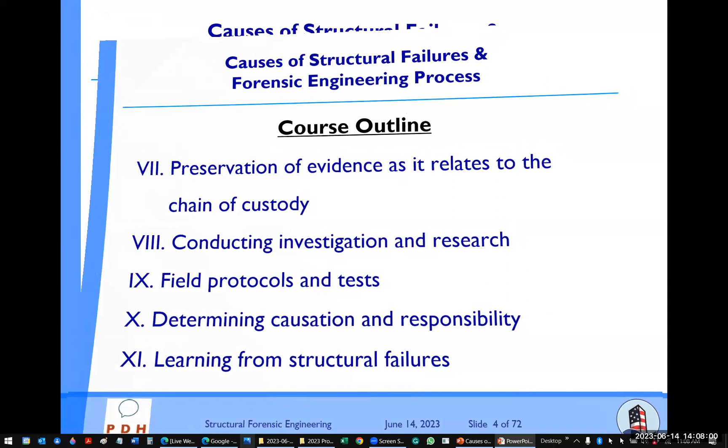So the first section, we're going to discuss structural engineering design errors, and I'll make sure I time myself accordingly, so there won't be any material left at the end of the presentation, at the end of the 2 hours by 1 p.m. my time in California.

Addressing subtle structural issues, failing to understand project objectives, underestimating demand requirements, insufficient design verification, and failure to validate the design assumptions. We're going to touch on each of these briefly and get some kind of idea about these.

My understanding, based on my past 15 years of providing webinars and presentations to engineers, is that the audience usually has a wide spectrum in terms of background, qualification, and experience. Some are new, 2 years fresh from university, some 50 years from graduation, some engineers, some architects, some general contractors, some mechanical engineers, wide spectrum. So I try to make sure the webinar interests everybody as much as possible, because I can't focus only on one group, like just structural engineers, even though I know the majority of the audience are structural engineers, but there are some from other professions.

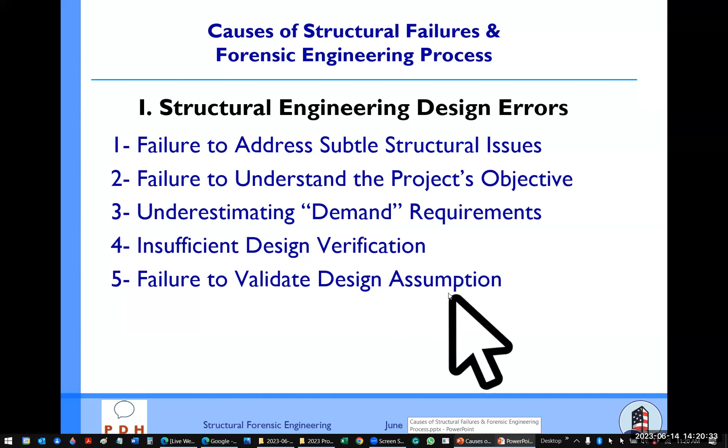So let's move on to the next part: defective construction. Again, just keep an eye on that spectrum of the audience.

Some of you might know some of these topics, some of you might be interested to get more information. I just try to make it interesting as a learning objective for all of us.

So there are two types of defects in construction: latent versus patent. Patent defects are the ones that are obvious, you can see them.

It's generally observed during a visual inspection by an ordinary person, it doesn't need to be a highly skilled structural engineer. It can be observed.

Like you see a cracked beam, cracked walls, a cracked concrete floor, a cracked foundation. These are obvious, right? However, there are other types of defects, which we call latent, referring to

defects that are not visually observable. Usually you need a licensed professional to observe them. For example, let's say

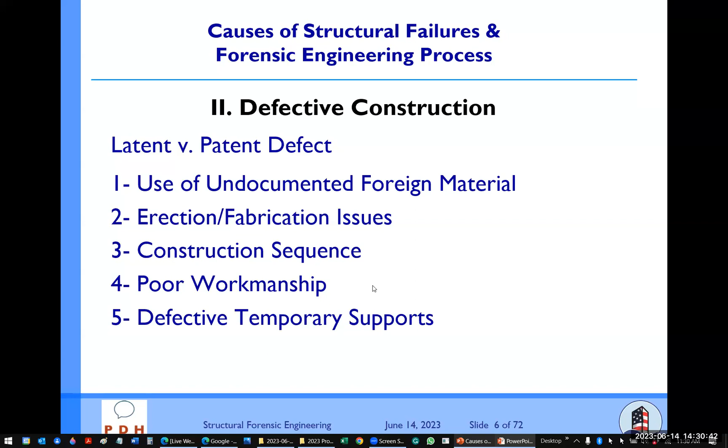Of course, not all of us get involved in temporary support design. There are some engineers that do that as a specialty, but again, when it comes for our review as a structural engineer of record, or EOR, it's a good idea to look at them.

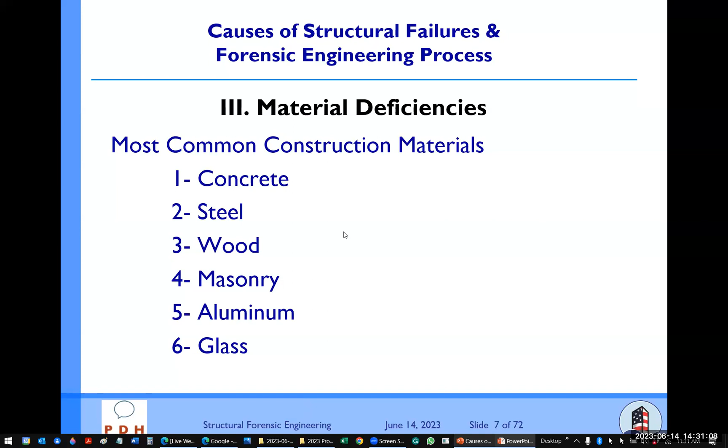Okay, so material deficiencies - these are the 6 most common construction materials used today in United States, in North America. Of course, fiberglass is another item in addition to the glass, but that's probably less than 1%. So the concrete...

There are 6 issues that can occur with respect to concrete deficiency: mix design, improper reinforcing, improper placement, improper curing, inadequate vibration, and on-site water addition, and so forth.

Forgive me, I have... okay. Roberto. Ah, I thought there was a question.

Okay, so concrete mix design.

I haven't dealt with that issue directly, but I've seen cases involving concrete mix disputes. That can be one item we keep in mind: the record of the mix design. Did it meet the requirement the structural engineer identified in his specification and general notes? Did it come to 3,000 psi, 5,000 psi? What was the design? That's important.

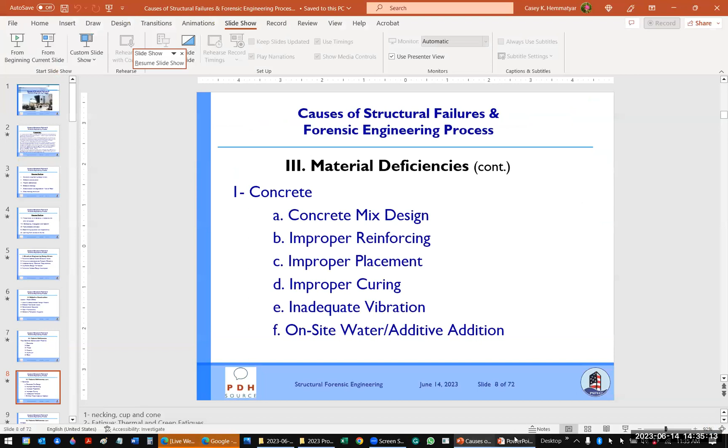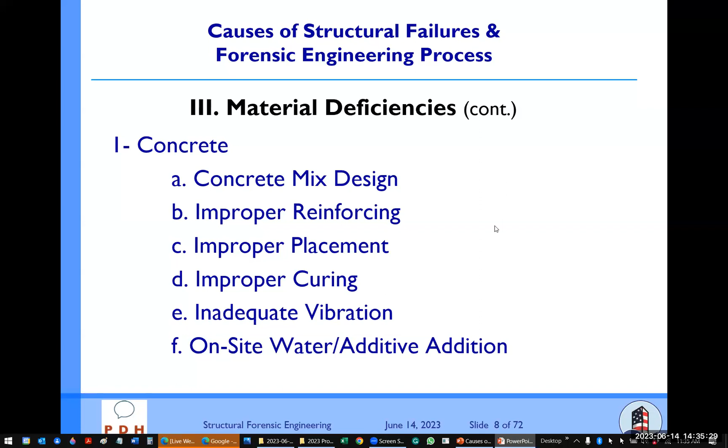Vibration - that's obviously the honeycomb and other issues resulting from improper vibration when dealing with large volumes. And of course, on-site water additions, which we all have problems with. That is very sneaky - sometimes there's no record of it, but it results in heavy deflection issues and displacement.

Okay, so the second common construction material - let's see what kind of issues we might have with them. Fabrication erection: improper installation of connections, weld quality, misalignment, localized failure, lack of environmental protection.

Let's start from the last one: galvanizing. Galvanizing is one of the methods used when dealing with steel to protect it against aggressive environments - for example here in California or Florida, areas near the ocean, very aggressive environments. It can destroy your building, God forbid, and you need to be very careful. If galvanizing is not done properly, it's essentially useless. It has to be done properly with all the details and requirements.

Another method, if possible, is stainless steel. It can assist us - it's a lot more expensive, has welding issues and so forth, but it is used in some cases. You don't want to build an entire structure with it, but some components, like canopies, exposed connections, guards, or handrails - these examples, you can.

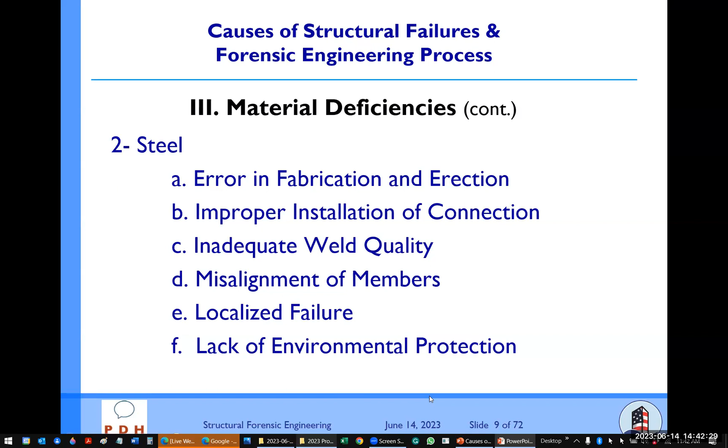Okay, next material is wood. Inadequate moisture content, expansion, contraction, lack of environmental protection, lack of proper maintenance, dry rot, insects, fungus, construction error—let's touch on all of these quickly.

Moisture content—have you ever been to Venice in Italy? The entire city is on wood piles, which go into the water below, and they've been there for hundreds of years. So does water destroy a wood structural member? It depends. If the moisture content is above saturated level, very high, then it doesn't allow growth of any fungus or any damaging process.

However, if it's above like 16% and below 60 or 50 percent, it can cause problems. It just destroys the wood very quickly. So let's keep that in mind.

Expansion and contraction—we're familiar with that, especially on roofs, and I've seen a lot of disputes because of that. We have a case study towards the middle of the project. I'll explain that, especially on roofs, when above is hot or cold or vice versa, below in the attic.

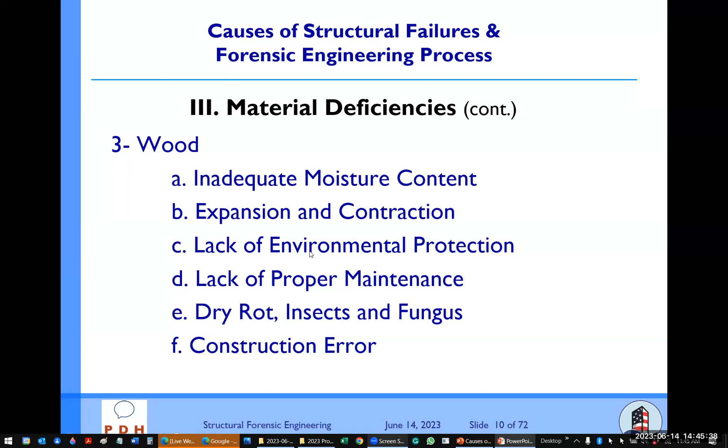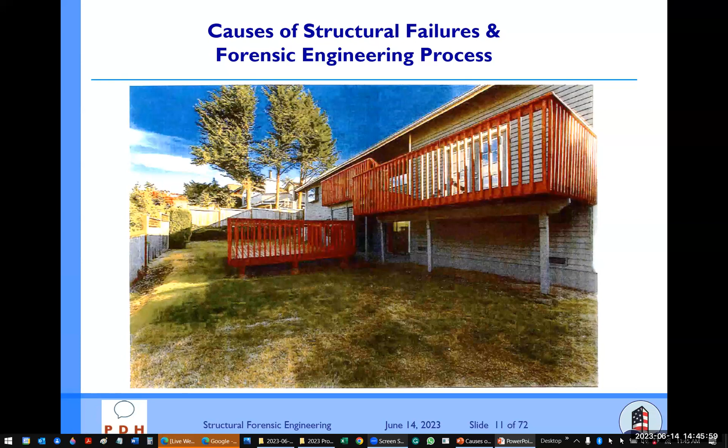Okay, let's take a look at this. This is one of the cases I had in Washington State. These rails are new—before, they were old rails and they failed, causing two individuals to fall from the second floor, resulting in serious injuries. This is after the fact. The individual was about 300 pounds and 6 foot tall, a guest of the homeowner. There were two guests, and the homeowner had bought the house from a flipper who installed these handrails without a permit. I can show you the connection—it's hilarious. This individual leaned over trying to take a picture and then fell, unfortunately.

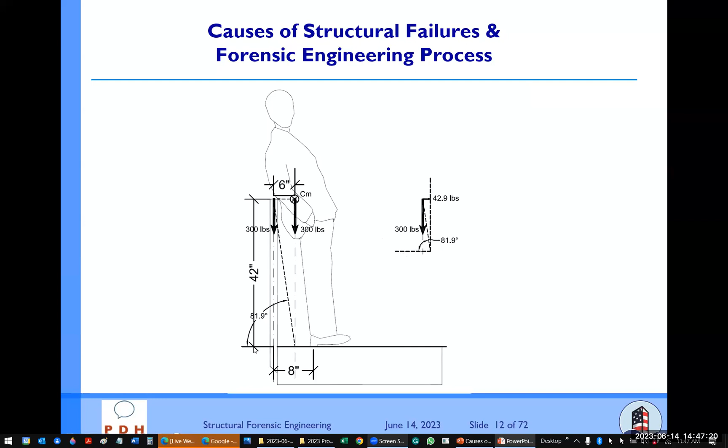So this is after the fact. They had to put these bolts and these 4x4 posts in between. And of course, this is the proper way of doing it.

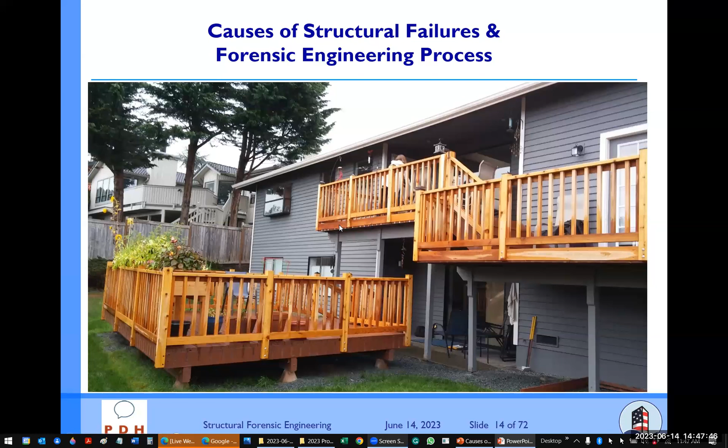Another example in wood construction. Again, this is a construction issue. He didn't have a permit. It's nothing to do with engineers, just the contractor.

Here's another example of construction and wood issues. This is a roof, seen from the attic. As you can see, these are OSBs, and these are the trusses every 24 inches. This line is a butting joint of 2 pieces of OSB. There's no spacing between these, so it doesn't allow for expansion and contraction of the OSB, and therefore it caused bumps or humps on the roof.

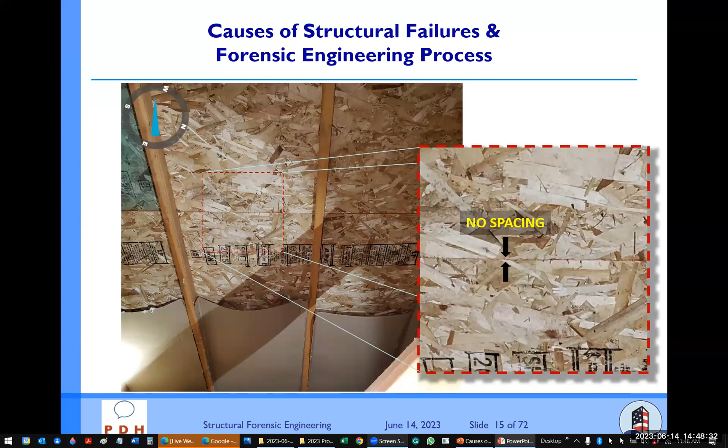So when you were standing on the front yard, you could see the humps on the roof all over the place. If you go back to the APA requirement, they specifically say you have to put a 1/8 inch gap in order to accommodate that.

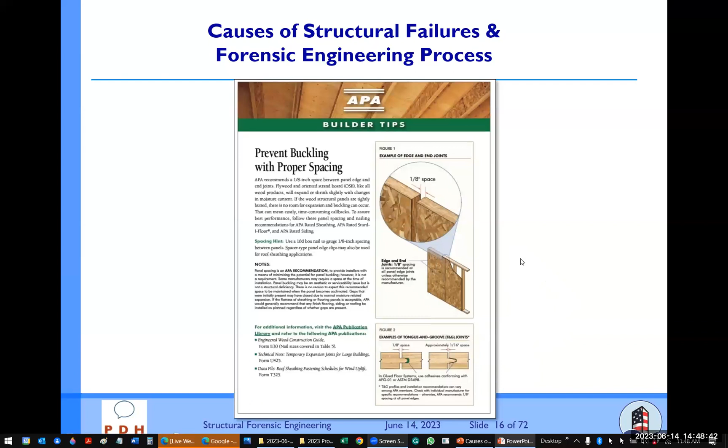Next material is masonry. Inadequate weatherproofing, deficient masonry units, improper mortar, thermal expansion, deficient expansion and control joint. Some of these are very obvious, but I had to mention them here.

Weatherproofing, deficient masonry unit, improper mortar - again, same discussion that we had for the concrete mix, the same thing applies here.

Thermal expansion and expansion and control joint - essentially we are discussing the same thing, more or less, unless you also want to keep in mind these facades, especially in Eastern United States, New York and so forth, where freeze and thaw can cause facades to fall off the building, and sometimes they fall from a 5-6 story building.

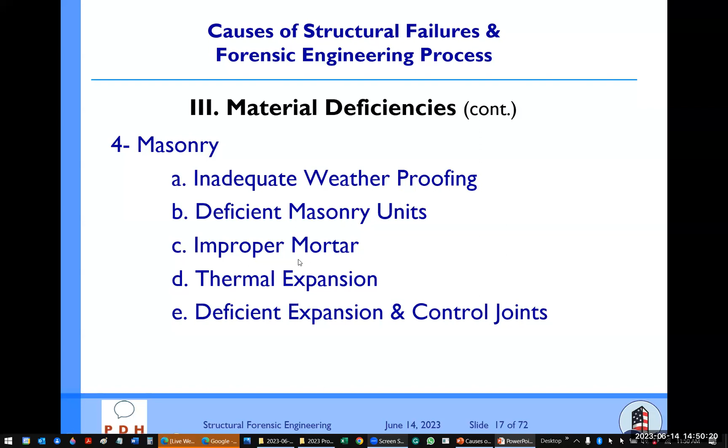That is an issue, but thermal expansion generally speaking refers to longitudinal expansion, and usually every 30-40 feet architects and engineers like to put vertical expansion or control joints in order to accommodate that. However, sometimes there are exceptions - you don't have to put that, depending on the construction condition.

I've heard that sometimes it can be avoided, but most of the time it depends on the construction configuration. Excessive loading, number 4 - depending on the material, the response is different, and depending on the load duration, and depending on whether the material is brittle or ductile.

What is load duration? Load duration, in my opinion, is extremely important. Load duration and load condition - static versus cyclic loading. Static or permanent loading versus cyclic loading.

Just to touch on this, load duration - as we all know, in NDS, the National Design Specification for wood, we have a load duration factor only for wood. We don't have this for any other material. It varies from 0.9 all the way to 1.7, depending on what kind of load - whether it's roof loading, dead load only, snow load, seismic load, wind load, or impact load. We can increase the allowable stress design with that load factor.

We can't do that with any other material, but we have to be careful. Sometimes when we come in for a roof that is constructed with wood members, we say okay, they allowed for 20 pounds per square foot live load, construction live load. Now I'm going to put 15 or 20 pounds per square foot, the same amount of load as was in the original design load sheet of the original structural engineer.

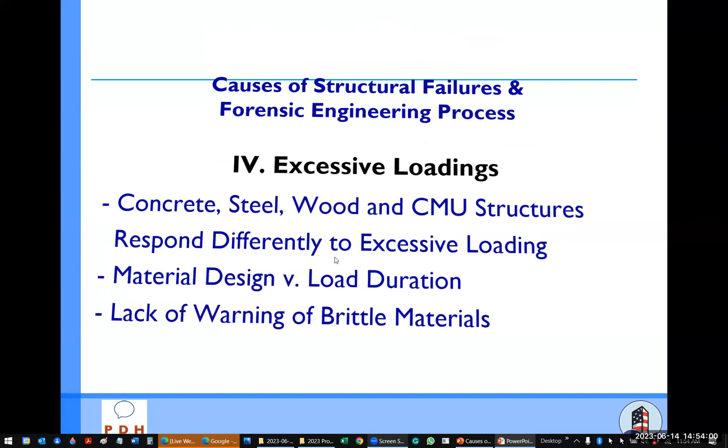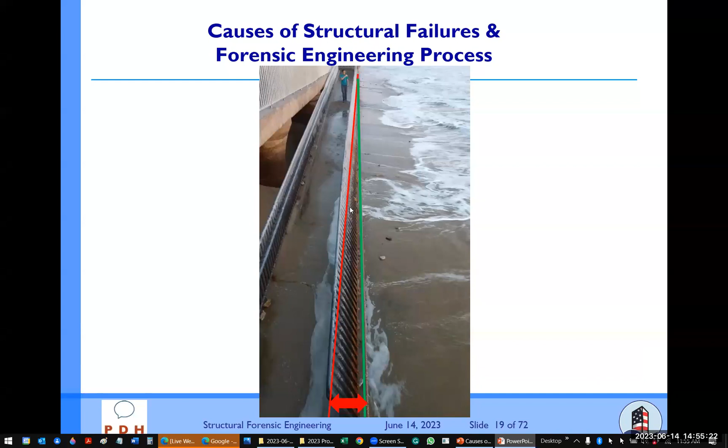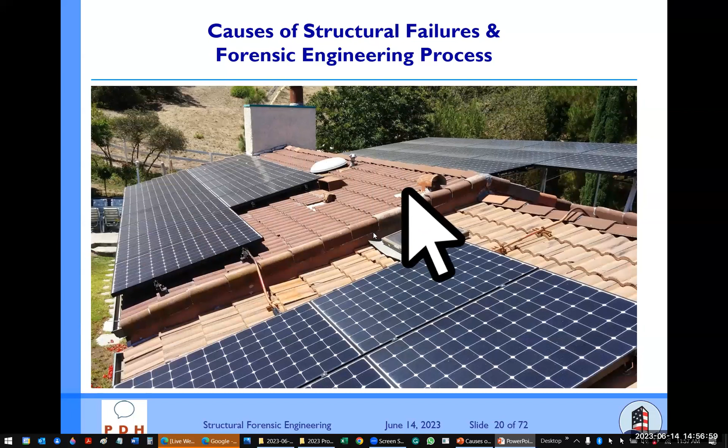The contractor decided to elevate them with 6-foot vertical poles or posts, and put them like that. You can figure out the problem—concentrated load going into the members, plus wind uplift and all kinds of stuff. So it caused the fracture of this ridge beam, which is exactly under here, and they were not accounting for the complications there.

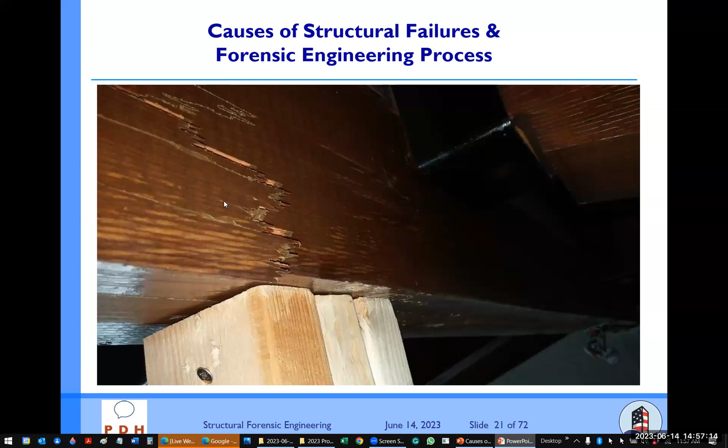So I required immediate temporary shoring, which they put on the bottom. You see this fracture is on the top—it's very, very serious—and the fracture comes in here on the bottom as well. These are temporary shoring. That was exposed wood, so you could see it, but imagine if it had drywall and ceiling finishes—it would be one of those latent defects instead of being patent.

Deterioration and degradation. Concrete and steel behave differently in this area. With concrete, we have corrosion and spalling. With steel, we have other issues.

Corrosion, again, I don't want to bore you. Corrosion in aggressive environments—near the ocean, as long as you're within 5 miles, 2 miles, or 3 miles, it can be serious. The closer you get, the more serious. So epoxy coated rebar is one of the solutions, and adequate concrete coverage is another solution.

As you know, when rebar in concrete corrodes, it expands several times the original material, and that force is enormous, causing spalling and cracking of the concrete. So be careful whenever you see efflorescence on a concrete material, or on a reinforced CMU masonry wall.

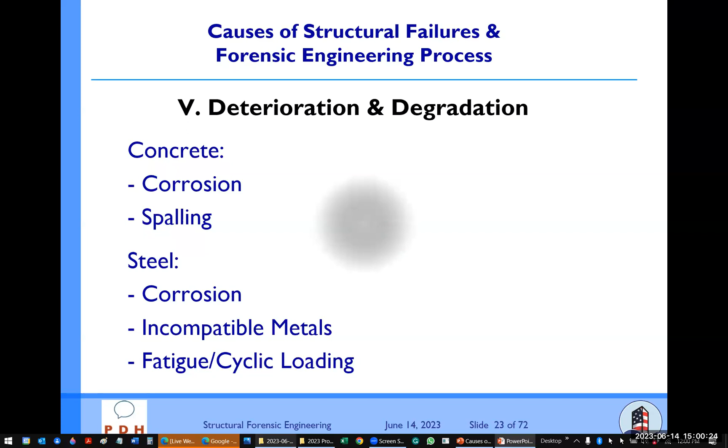Fatigue and cyclic loading—that's a completely different animal, very serious. I've seen it many, many times causing failures. We'll touch on that a few slides down, because one of the cases at LAX, that was the problem.

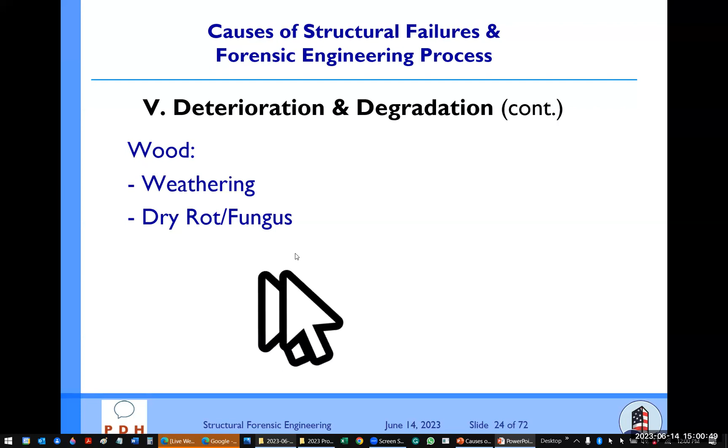Deterioration and degradation—weathering and dry rot fungus. That's very common, I'm sure everybody is aware of that. Sometimes you're forced to remove and replace; sometimes you can just do the repair, but the repair has to be done properly—epoxy, or other methods. CMU.

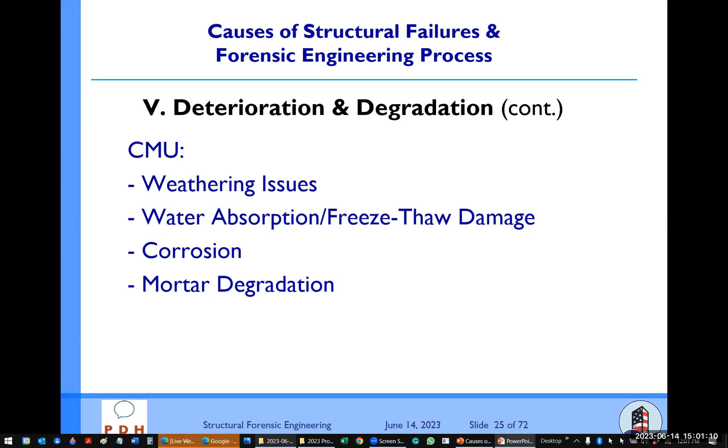Weathering issues, freeze and thaw damage that we discussed, corrosion and mortar degradation, similar to concrete that we discussed and similar to the defect that we discussed earlier.

Number 6, documenting the failure. Let's say there's a failure and we are at the site and we want to document it. Sometimes we go a year after the incident, but there are still ways to do that, and that's why preserving evidence becomes so crucial. Sometimes you're there immediately, a day or two or a week after the incident, and everything is untouched, which would be the perfect condition. That would be the best.

Identifying valuable physical evidence, whether it's a fire, mudslide, flooding, earthquake, gravity failure, wind, whatever it is, there is evidence that we need to collect. Let me give you a small hint for fire, for example, that will be very helpful if you get involved in a fire investigation. I have other programs on fire, flood, mudslide, and earthquake scenarios where I discuss this extensively, but here I'm just touching on it briefly.

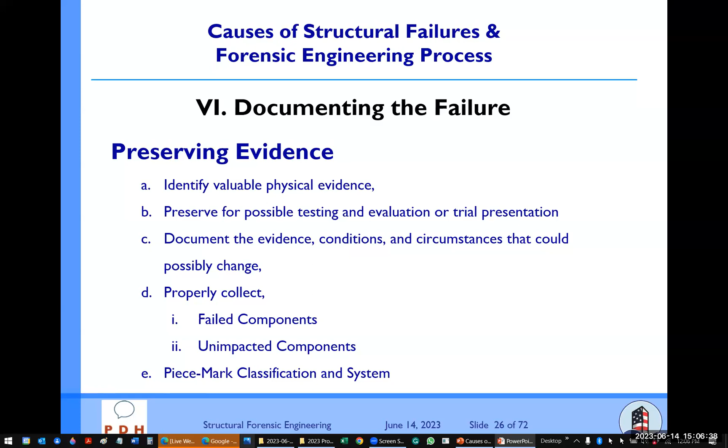Piece mark classification system: usually when there's a legal dispute, every component we collect has to be piece marked. That's a legal terminology, the mark used for each item of physical evidence. That is a unique number, and in all documentation, reports, everything, we refer to those piece marks to make sure there's no confusion. Another item you might be interested in is called a Bate number, which probably a lot of you already know. A Bate number is again a unique number for documents.

Piece mark classification is for evidence, for physical evidence, but Bate number is for documents. Every single page of every document, whether it's a deposition, a structural engineering calculation, or a plan, has a Bate number assigned to it, which is very unique. So when we're talking about something in a deposition, a court trial, or a report, we can refer to that Bate number and it's very unique. Nobody gets confused. We don't need to say such and such report dated by that author by that page number. We just give them the Bate number, and it goes exactly to a specific page of a specific document.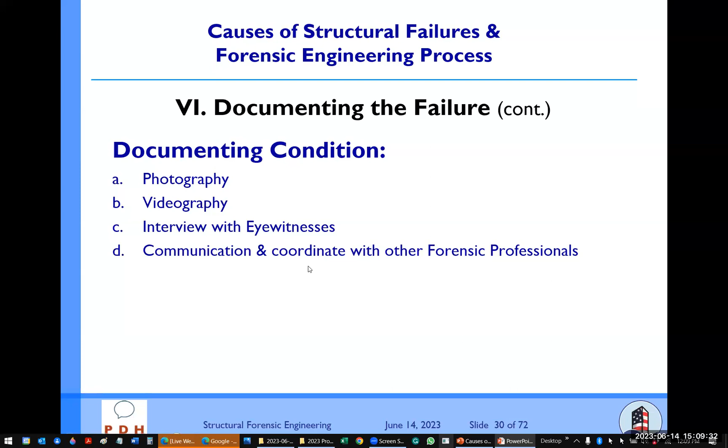Chain of custody — what is chain of custody? In structural engineering, you go to a property, to a site, and you see some physical evidence. Somebody has to be in charge of that until the case is settled, and only then can you throw it out. Until then, somebody has to make sure and is legally responsible to preserve that same condition as at the time of collection, for the whole investigation process and for trial or arbitration, whatever it is. That process of maintaining and holding this in your possession is called chain of custody.

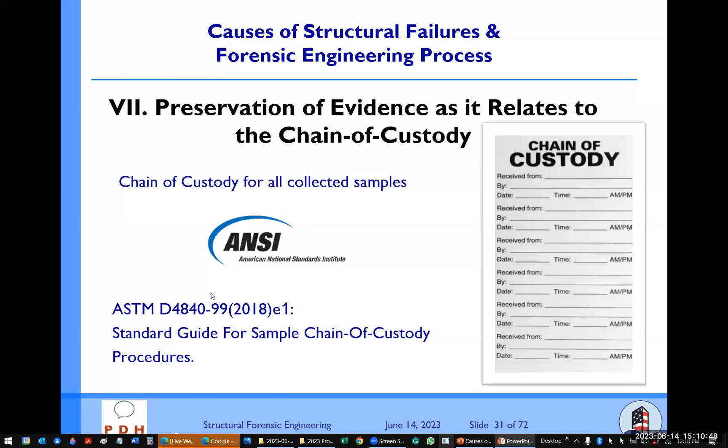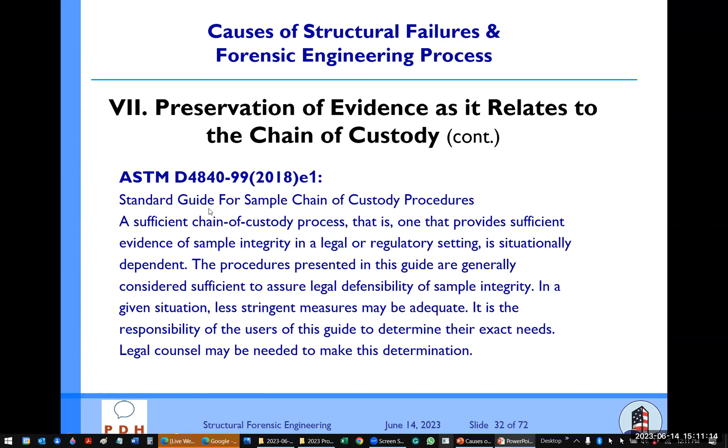There is a specific guideline by ANSI and ASTM that is published and explains that procedure. It's for scientists and engineers, not for lawyers or other areas of law — it's for us. It specifically explains, when you obtain that publication, how to go step by step. It's not a one-page document; it's like a book, and you can go through that process and see exactly how it works.

Now let's go back to that LAX jet bridge failure. It's 12:10 right now, so I have 50 minutes for another 40 slides. I'm going to make sure there's a meaningful way of using our time, not too fast, not too slow. So what is this member?

This member is an HSS member that was holding up the cantilever portion of the jet bridge that connected to the aircraft, a Boeing 737. So it failed like this. This picture was taken a few minutes or a few hours after the failure, right at the site. Somebody took this picture — one of the victims was the pilot. He was standing on that piece letting everybody get out, chit-chatting with the last passenger, and within about 5 minutes this happened. Somebody took this picture, and it's such great evidence. I'll explain why it's such great evidence in a few moments.

This is exactly how it failed. It's still hanging and dangling here, as you can see. But look at the corrosion here — see the corrosion? This is a quarter-inch thick section, and the corrosion goes all the way through. This is the seam, the HSS — hollow structural steel section — seam here. Let's see what's going on: it's a 4x4 by quarter-inch thick member.

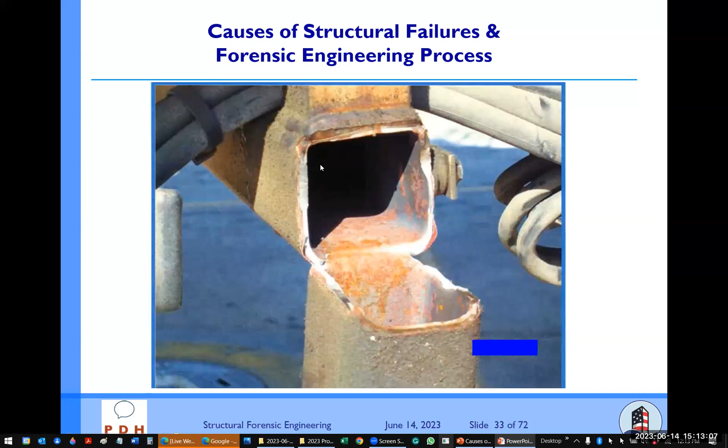This is a very interesting case because it involves fatigue and cyclic loading. You might ask, what does cyclic loading have to do with a jet bridge? I'll explain that in a few moments. So here, conducting the investigation involves identification of debris, destructive testing, as-built drawings, original calculations, shop drawings, inspection records, and correspondence. Be very careful with one item.

Most people, whether laypeople, engineers, or attorneys, have no clue what destructive testing is. They have no clue. The rest we know - identification of debris, collection, piece marks and everything, as-built drawings, original calculations, shop drawings, inspection records, correspondence. But this is tricky. We need to be very careful with that.

A lot of engineers go to a property and see that the opposing engineer removed some wall finishes or ceiling finishes, and they just panic. They say, oh, you did destructive testing without my permission. That's not destructive testing. Exposing structural members is just exposing structural members, removing finishes.

Destructive testing has a specific definition. It means you collect a sample from a site, whether it's steel, wood, concrete, or whatever. You take it to a laboratory, you test it to the point of failure. Failure - it has to fail. So it involves laboratory testing.

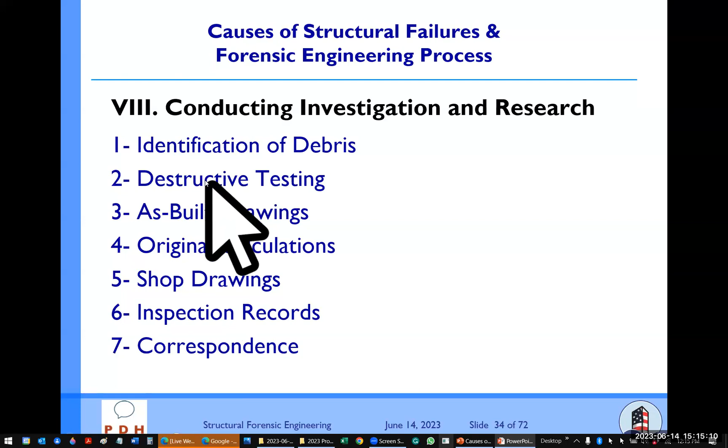Opening up and examining the condition of a structural member, whether it has cracks, corrosion on the steel, or whatever, that doesn't constitute destructive testing. A lot of lawyers are very, very confused about that.

Okay, what is this? This is an interview that the History Channel did with me. It's on YouTube. If you go to YouTube and type this in, it has 4.5 million views in one year. It's a 40 minute documentary. The last 10 minutes of this documentary, I had the honor and privilege of being the interviewee. Very briefly, you can find it on YouTube.

For many years, probably 7-8 years, it was on Amazon, and you had to pay to watch this. But since last year, they've just put it on YouTube for free. So you can go in, and if you are interested, the last 10 minutes - essentially, if I want to explain to you very briefly, is that...

Pumapunku is an ancient site in Bolivia, South America. And the History Channel was trying to find out what destroyed this structure. These pieces that you see, some of them are 20 tons. And the reason they're very interesting is that this site is way up at a very high elevation, several thousand feet above the sea.

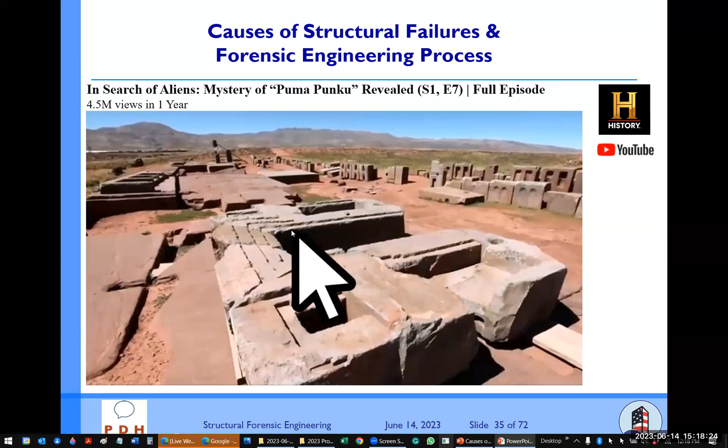So I do believe in - what's that terminology - life other than Earth, but I do not believe in things like Area 51.

Aliens and that kind of stuff. No, but I do believe there must be some kind of civilization somewhere in this universe. Whether they have reached our Earth or not, that's very remote, I don't think.

So field investigation methods, field instrumentation, destructive testing that we just discussed, and non-destructive testing. When we expose a structural framing member to visually inspect it or do some measuring, like with a Schmidt hammer, that's part of non-destructive testing. Removal of wall and ceiling finishes and exposure of the structural framing are the different categories we just talked about.

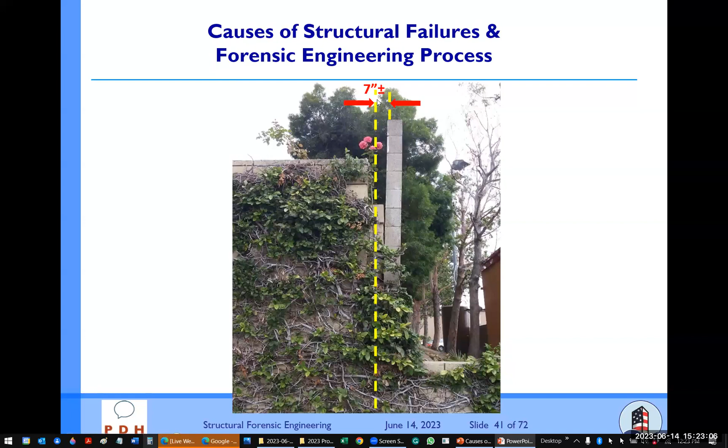So I'll show you in the pictures. As you can see, there's 7 inches of deformation at the top. The wall is 7 inches, moving away from the building. So obviously there's a problem.

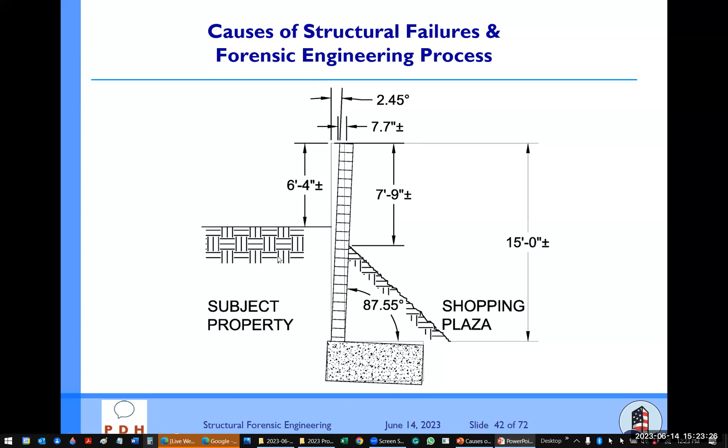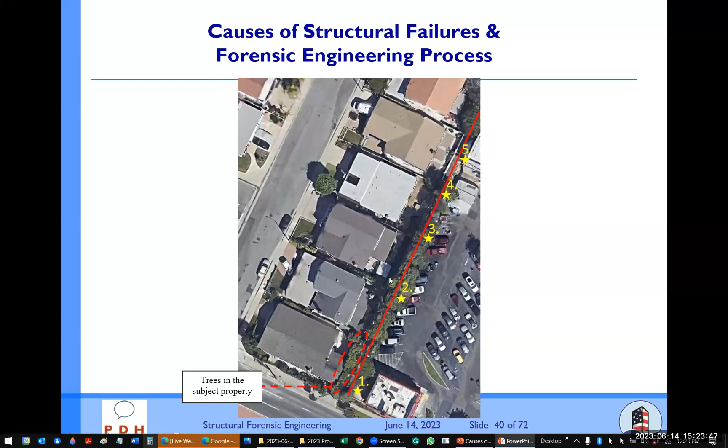Another case of determining causation and responsibility, why it happened and what the cause was. Very simple: on the right-hand side, a bulge in the stucco up to about 4 inches, in the stucco of a multifamily building. That's another category we can discuss, and it's a little tricky figuring out why it happened and what caused it.

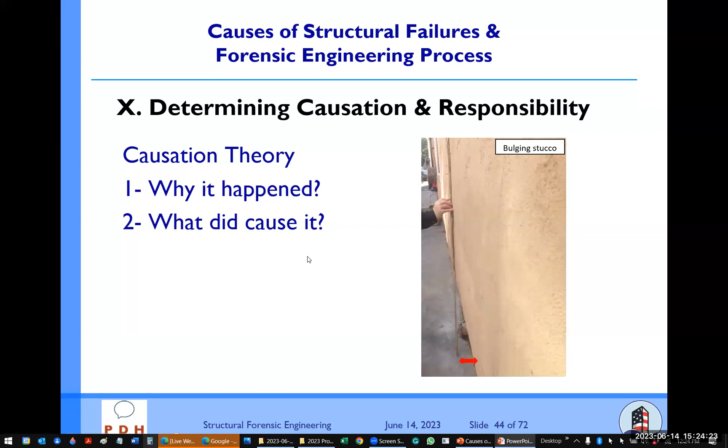Determination of causation and responsibility, number 10: identify all possible scenarios, eliminate unlikely scenarios, to converge on the most likely causes of failure and key technical causes that can be supported by facts. Understand the process of design, construction, inspection, and maintenance prior to failure.

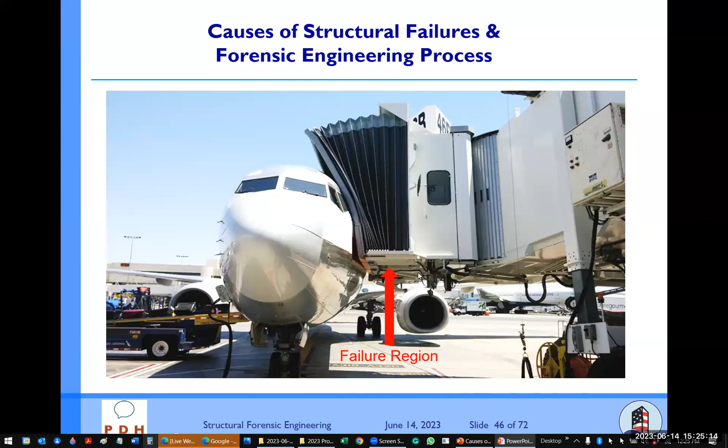Over the next few slides, we'll explain what happened in this case, which in my opinion is one of the most interesting cases I've done. This is the area where the failure happened, the cantilever section of the jet bridge. I took a picture from below, these pictures are by me, I took them myself.

This member is new, it was removed and replaced. The old jet bridges had a 4x4 by half inch, by quarter inch HSS section. After we determined the design was defective, they changed them to a larger section. I wasn't involved in the design, but I know they changed it so this is not a 4x4 anymore, it's more like a 6x4. This new one that I had a chance to inspect was a year after; this is the section of that old 4x4 that failed. As you can see, from this location it cantilevers, getting supported here on the left-hand side and here, and then cantilevering this much.

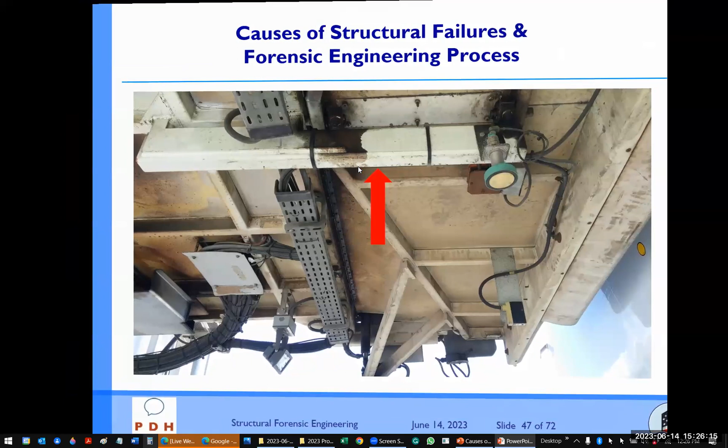Okay, this is from another angle, and let me explain to you. This is that piece that I took a picture of myself again. This is the failed member. One end had the middle section that was supported, and then the rest was cantilever.

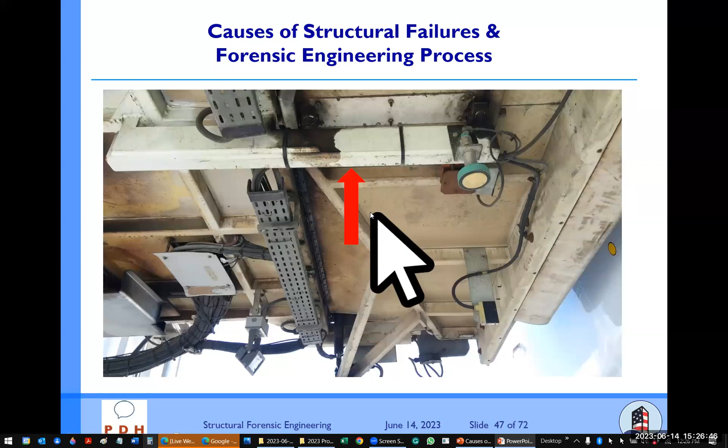So when you go back to this picture, this is the one end of support, the other support, and then the cantilever section. So go back to the failed member. This is the closest part to the aircraft, and this is the most distant part from the aircraft.

So this area failed, this area failed, and there's a plastic. You can see it says the samples, piece numbers, everything, piece mark numbers, everything.

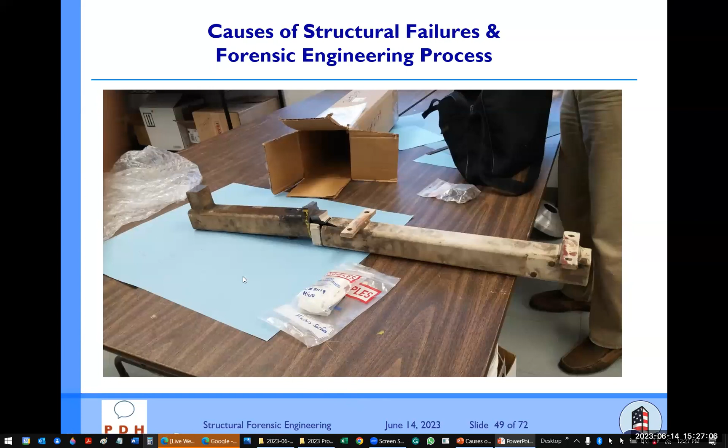Okay, now what happened? Again, the same picture we looked at a few minutes ago, and a closer picture. They had to cut this. This is a cut, but this is not the cut. This is the actual failure, and you see all the corrosion marks on it.

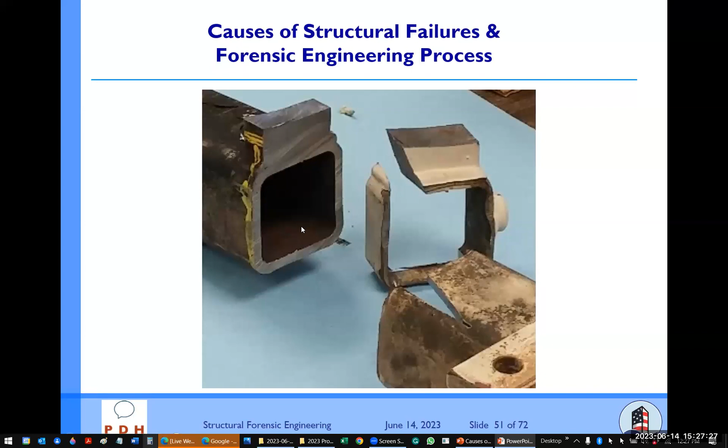So let me quickly explain to you. In order to explain, let me go back to this picture. Okay, this picture: aircraft, jet bridge, cantilever section. So there's a phenomena in structural design.

It's called fatigue and cyclic loading. Let's briefly touch on that within a few minutes so you can have some idea. Mostly mechanical engineers are very familiar with that because in automotive and their field they deal with it on a regular basis. Structures, we don't deal with that. Maybe 1% of us deal with that.

But here, what happened? Why cyclic loading here? Okay, Boeing 727, we went through the LAX record. We found that this particular Boeing that we knew the record number, all the serial number, everything, was serving like 12 years. I'm sorry, let me correct that.

Yeah, we checked the Boeing that was coming at this particular gate, particular section, particular airline involved in this incident. We checked it like the last 12 years, it was coming there. We went through the record: how many flights a week, how many times, how many passengers, and with this particular jet bridge involved.

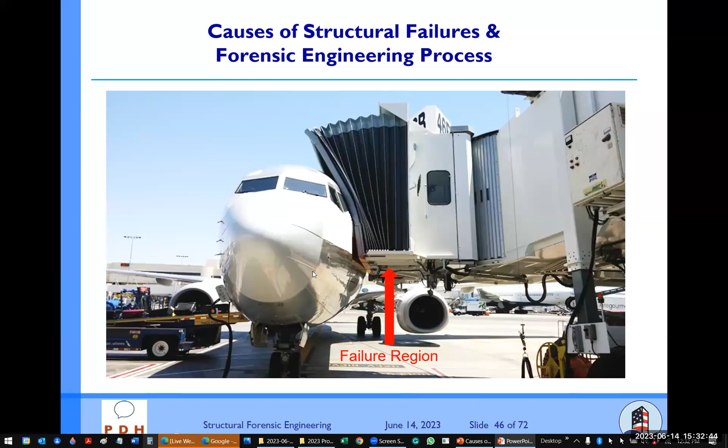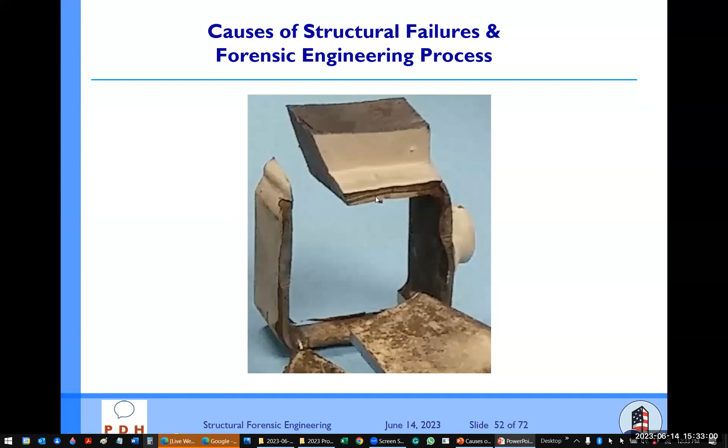Fatigue itself is a problem, but when combined with harsh environment, it can be disastrous. Imagine this is what happened. Now when we look at this picture and this picture, you see the corrosion here. This picture more clearly shows the corrosion, and of course the very first picture at the site.

This picture is by the metallurgy engineer, showing the seam of the HSS, and it identified the design flaw. I reviewed the design calculation, structural calculation, and there was no reference to fatigue, nothing, or cyclic loading, nothing. Just a simple modulus section. This is my demand, this is my section, boom, 4x4 steel section, check mark.

That was 1 page, maybe 2-page calculation. And it was not within the United States, it was in a foreign country. That designer had no clue about what disaster this can be, and God knows how many of these jet bridges are built and used throughout the world.

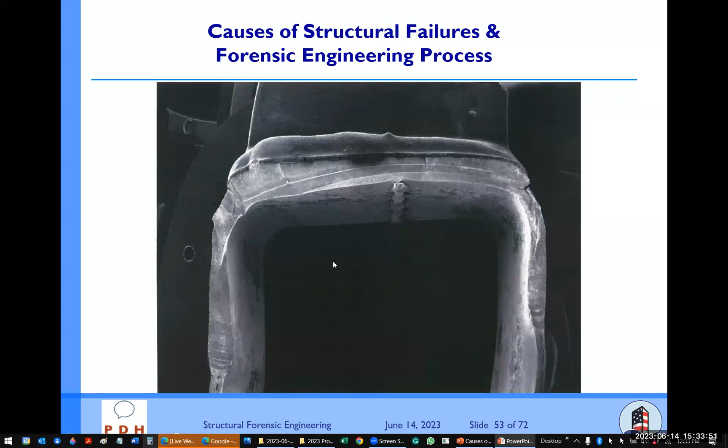Done with that jet bridge. We're at slide 54, we have about 25 minutes. Learning from this, this is the 11th number of them. So we're going to go through some of the cases, understanding the failure mechanism in order to avoid them.

Every building cycle, every three years, the building code changes, because we're trying to reflect those into our new building codes. Imagine back in the 1920s when our building codes were like 10 pages or so, and then gradually built up. Now it's like a full library you can't keep track of, you have to have PDF versions, 50,000 pages or so combined with the standards. So ensuring our structures are safe and improving public safety.

Question from Roberto Sanchez and Doug. If I may, I'm just going to quickly touch on these two questions. Do you test the air at the truck or the chute when pumped?

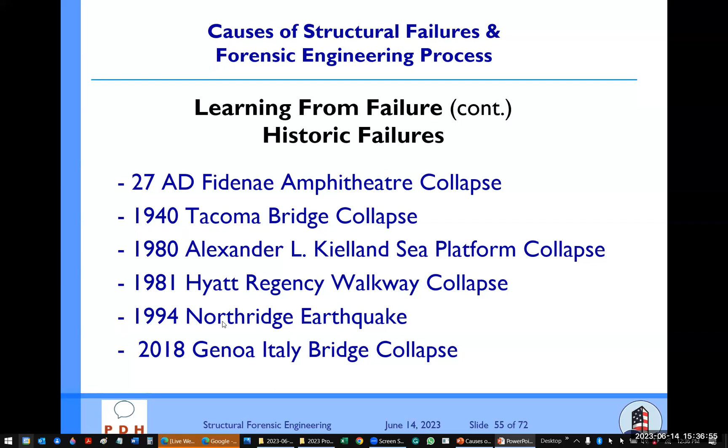So, some historic failures, let's take a look. 27 AD amphitheater collapse, Tacoma Bridge collapse in 1940 - this is one of the very interesting ones, happened 80 years ago or so. Then there was the 1980 platform collapse, Alexander Kielland collapse in Norway, Hyatt Regency, Northridge earthquake that caused a lot of failure, and the Genoa, Italy bridge collapse. We'll just touch on these briefly, very briefly on each of these.

We'll look at the question 5 minutes before we end. Okay, Tacoma Suspension Bridge opened July 1940, collapsed 4 months later in November 1940.

This picture is during the oscillation when the wind apparently lasted about 3 hours or so. Look at this side, do you see this side? This is a girder, and the girder is not short, it's not like 12 inches. It's several feet tall, I think it's about 3 feet tall.

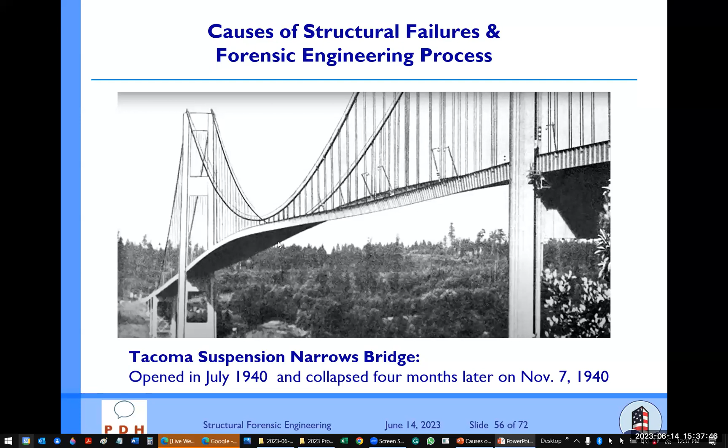Remember that in a few moments I'll explain to you what happened, what was the mechanism. I'm sure this is historical, a lot of you already know that. But the specific causes are still debated, with 3 theories. The top theory is aerodynamic instability, the next one is random turbulence, and then periodic vortex shedding.

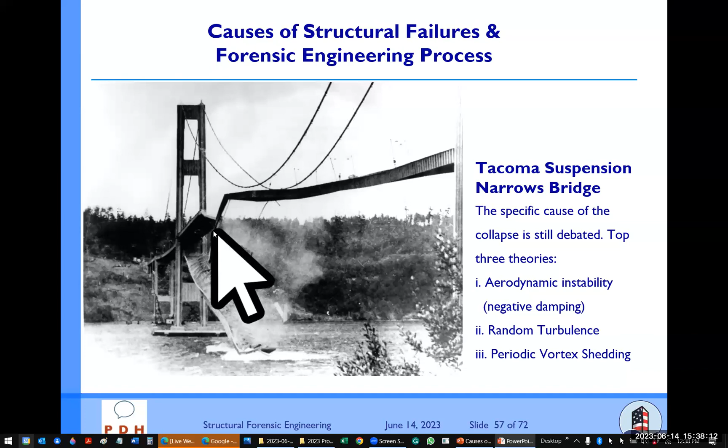Let's go through one and see what happened. So the motion was about 3 hours, the wind was only 42 miles per hour. The frequency of the bridge's torsional oscillation was observed at about 12 cycles per minute. A support cable at midspan snapped, resulting in an unbalanced loading condition.

Among other things, wind drove the bridge to oscillate at its natural frequency. Frequencies of wind and bridge were then in resonance, causing amplification. You and I know about that in structural, in earthquake engineering, when the frequency of the building and the frequency of the waves match, it significantly amplifies the shaking oscillation, and we call that resonance. Same thing here - excessive flexibility of the bridge, not being sufficiently stiff, lack of sufficient stiffness here, which is both of them.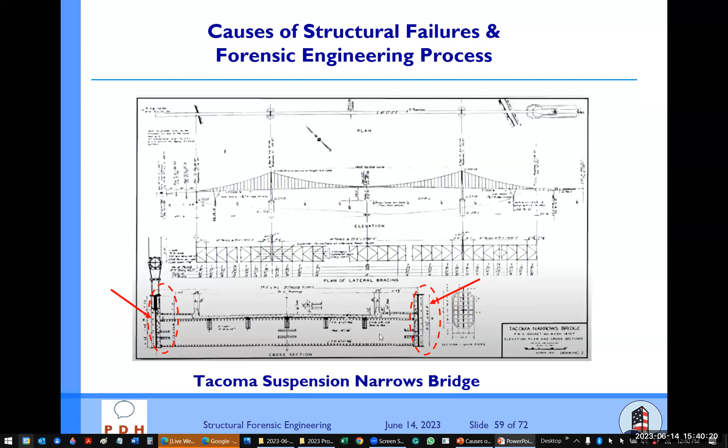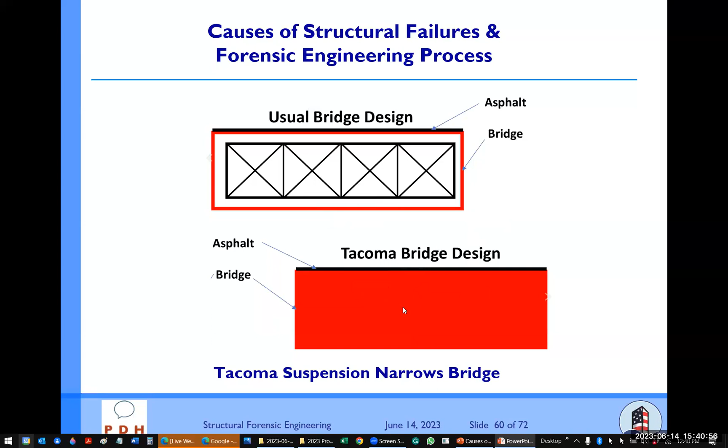Okay, usual bridge designs back then were done with a truss section. As you can see, this is a diagonal member, but air can go through, wind can go through. The Tacoma Bridge section is solid, so obviously it resists that air, and that resistance had to get transferred somewhere through the load path, transferred to the deck, and cause all that kind of problem. So that's one of the primary reasons. So that was the Tacoma Bridge.

Another disaster that happened, this one goes back to fatigue. That one was resonance. Again, subtle issues, not very crucial, but subtle. The Alexander Kielland platform built in 1976...

Collapsed four years later, 120... hold on one second, I need to get rid of something quick. This is one of my son's laptops that I used today.

Anyways, so in four years it collapsed, 123 lives perished. Cause of the accident was an initial weld defect, a very tiny defect in this humongous structure that accelerated with fatigue failure. Remember, the most vulnerable part of a structure for fatigue and cyclic loading is not the members, not even the bolts. It's the welds. Welds are the most vulnerable component and part of a structure for fatigue.

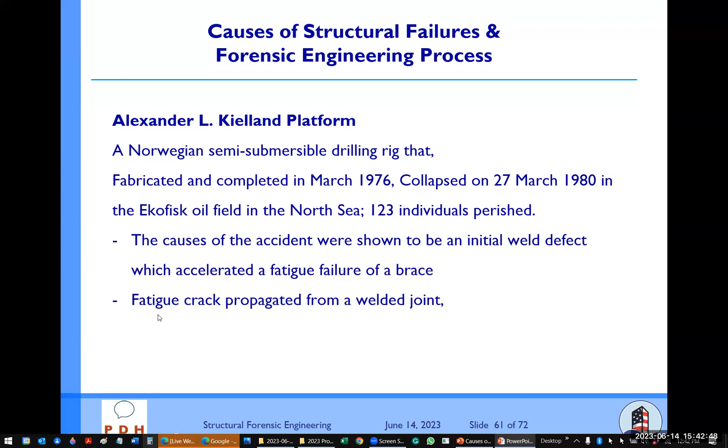Okay, the same problem here, more or less, if you remember that LAX jet bridge. You may say, oh, there was no weld there. Yeah, there was a weld, the seam. Remember the HSS has a seam, the seam weld, there was a weld there. Here, fatigue crack propagated from a welded joint. Let's go and see what happened.

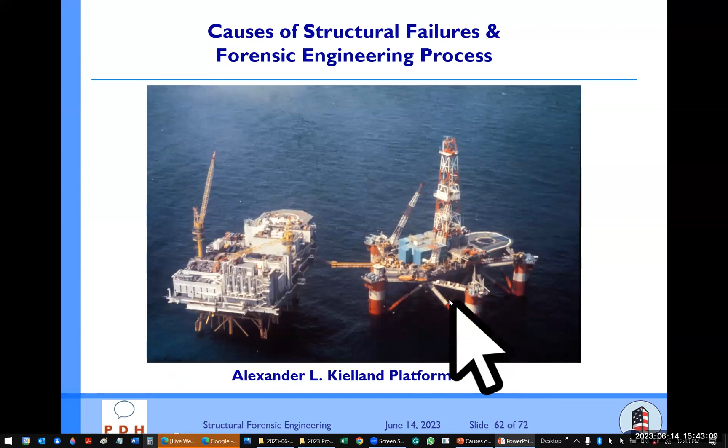This is that structure, this one on the right-hand side. See this humongous column? These columns are several meters in diameter in Europe, and then there are braces. When you go under this water, this is what you see under the water. The platform is on the top. This is they were floating.

And there was a hydrophone installed here. A hydrophone is to determine the sounds under the ocean, under the water. So a fatigue crack occurred from a pre-existing crack in a fillet weld, between the hydrophone support and the brace D6 here. So that's the area. Very minor initial defect, but it took four years.

Why fatigue? Because fatigue only comes from cyclic loading, it doesn't come from static loading. Why cyclic loading here again? Similar to the jet bridge, waves. This was a floating structure, so it goes up and down, and that gives you reversal of loading, cyclic loading, and fatigue.

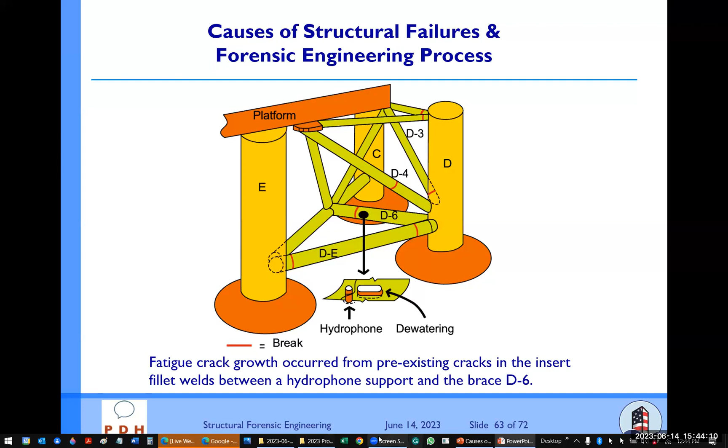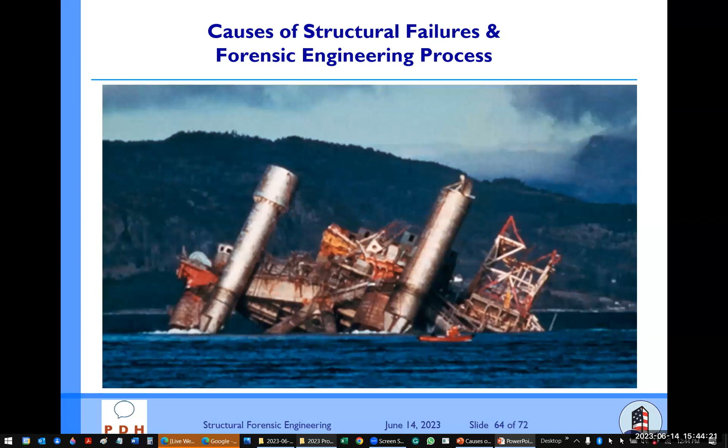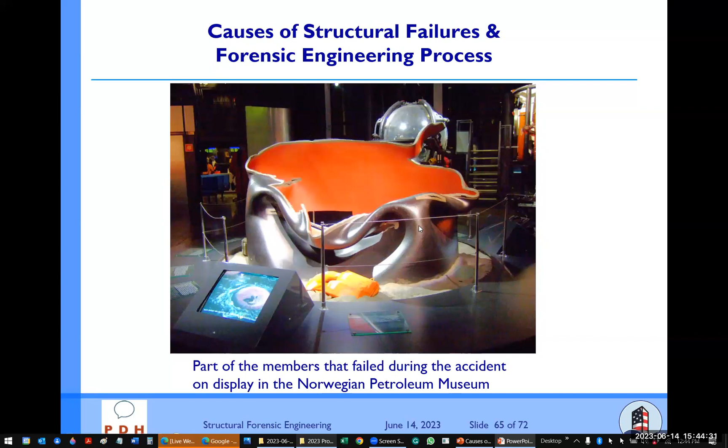Unfortunately, this is the picture. Norway celebrates or respects this event every year on the day that it happened. They remember this. This is in the museum, it's kept there, and as I said, it's several meters in diameter. That very failed member, they just kept it there, and this shows the process that happened. And this is that location.

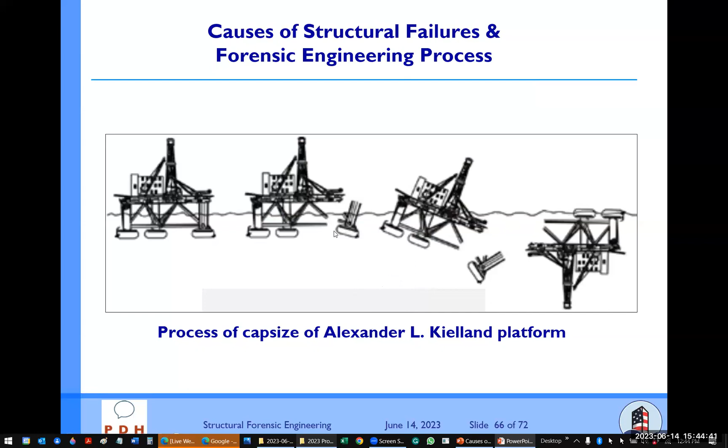This is a video, we don't have time to watch the whole thing, I'll just show you a few moments of that.

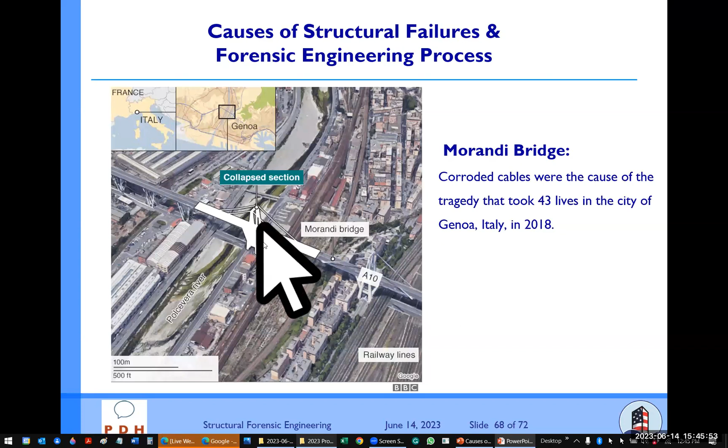What's the problem here? Corrosive environment, right on the water area, a corrosive environment. These cables inside were encased in concrete, and they corroded. When you encase cables in concrete, essentially you're not protecting them. There's no way for us to stop moisture from getting inside the concrete into the cables, there's no way. If they didn't encase them it was much better, because the moisture did not get trapped. Now it got trapped, it corroded and failed.

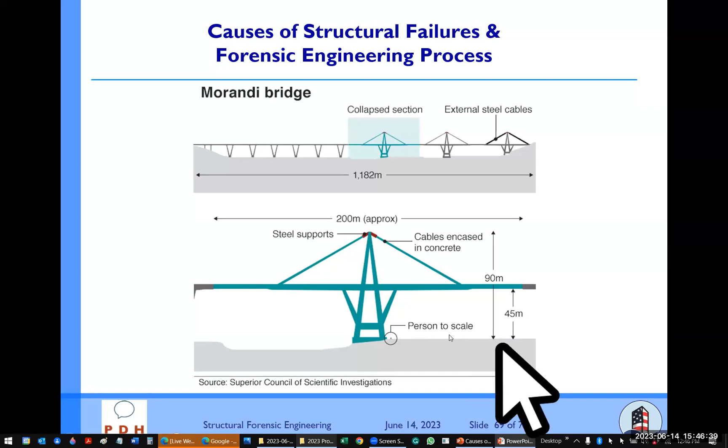And the bridge collapsed. This is the scale, a person here, so it's quite tall. It's about 300 feet above the water level, or above the bottom.

Almost getting close, 15 minutes left. I think I went too fast, but that's okay. We have more time for discussion.

Having consistent assumptions with the structural behavior, software. Software are great. Back in the late 80s, when computers started to develop, personal computers, we used to call them personal computers back in the 80s.

So I learned, I got a few computer programs that were made back then, and I modeled structures, designed them. But very soon I learned, I was maybe about 28 years or so, I discovered that, hey...

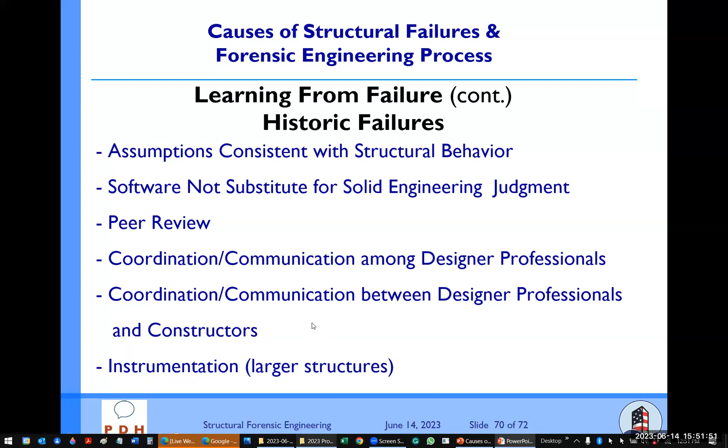And that's it, that's the end.